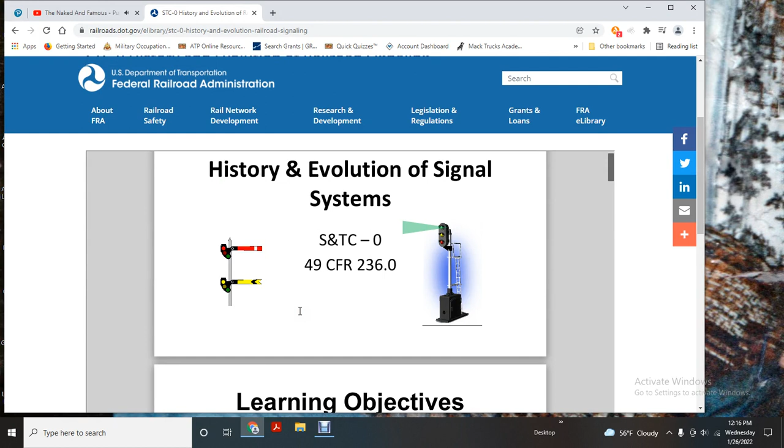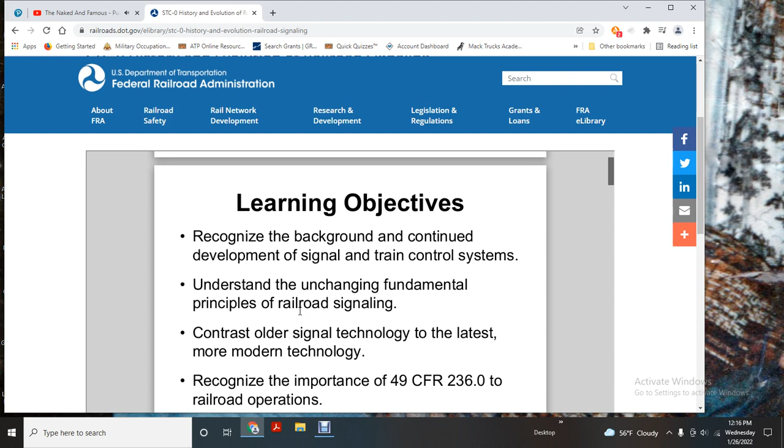Alright, history and evolution of the signal system: signal and train control, Title 49 CFR 236. Learning objectives: recognize the background and continued development of the signal and train control system, understanding the unchanging fundamental principle of the railroad signal. Contrast older signal technology to the latest, more modern technology. Recognize the importance of Title 49 CFR 236 to railroad operations.

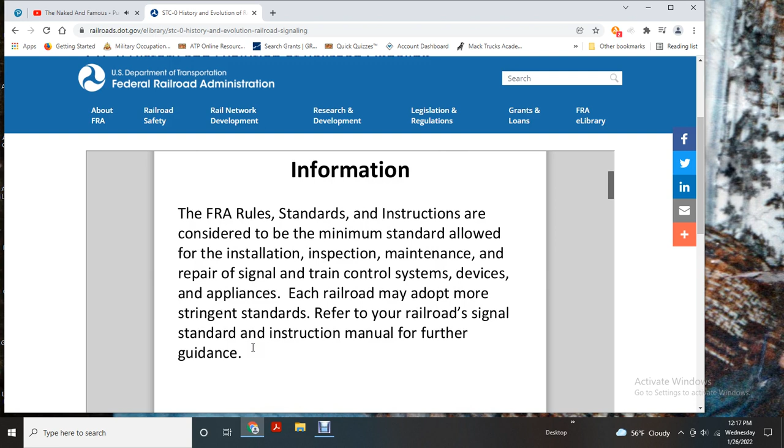Caution: the following presentation was developed to provide general information only. For detailed compliance information, please refer to Title 49 CFR 236 Rules, Standards, and Instructions, and the Signal and Train Control technical manual. Each employee should refer to the appropriate manual or regulations when dealing with any specific information. FRA rules, standards, and instructions are considered minimum standards allowed for the installation, inspection, maintenance, and repair of signal and train control system devices and appliances. Each railroad may adopt more stringent standards. Refer to your railroad's signal standard and instruction manual for further guidance.

Early railroad operation. Early trains operated with a system called the time interval rule. The trains ran by strict schedules, cumbersome, time-consuming, exhausting. If one train was delayed, waiting trains had to wait 1 hour, and a brakeman would walk 20 minutes out with a red flag. The engineer would move the train forward. The first brakeman dispatched the second brakeman to walk another 20 minutes ahead. This process was repeated until the train reached the next station.

Telegraph in early railroads. 1840s, Erie Railroad begins installing telegraph. In 1851, the Erie Railroad issues the first telegraphic train order. 1860, rapid expansion of railroads is matched by expansion of the telegraph system. 1920s, over 78,000 telegraphs were working on American railroads.

First telegraphic train order: to agent operator Goshen, hold the train for further orders. Charles Minot, superintendent. Then he hand wrote the following order: to conductor and engineer, day express, run to Goshen regardless of the opposing train. Charles Minot, superintendent. The train order method of operation was born September 22nd, 1851. This method of operation is still used on some lines today.

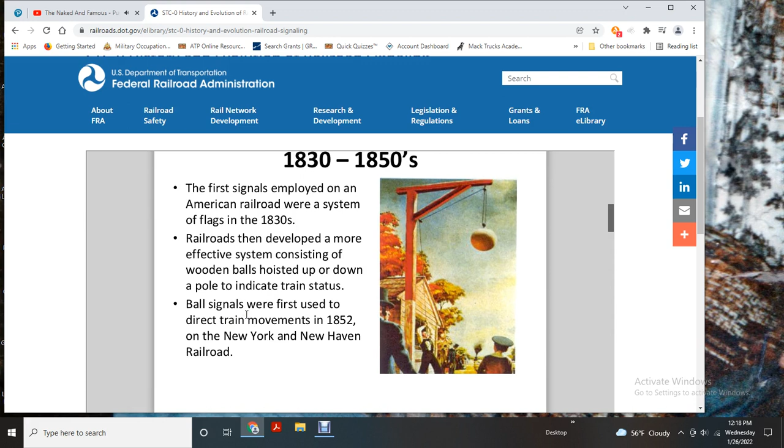1830s to 1850s, the first signals employed on American railroad systems were systems of flags. In 1830, railroads then developed a more effective system consisting of wooden balls hoisted up and down a pole indicating a train's status. Ball signals were first used to direct train movements in 1852 with the New York and New Haven Railroad.

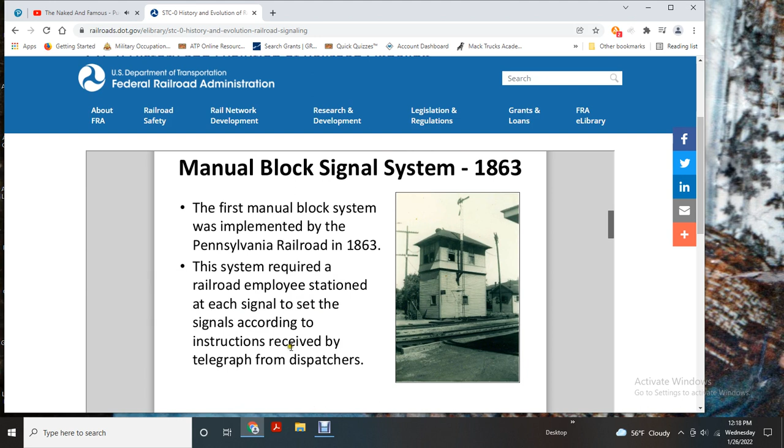Manual block system, 1863. The first manual block system was implemented with the Pennsylvania Railroad. The 1863 system required a railroad employee stationed at each signal to set the signals according to instructions received by telegraph from the dispatcher. Manual block system, Association of American Railroads: a block signal system where each block is governed by block signals controlled manually, or block limit signals, based upon information by telegraph, telephone, or other means of communication. Manual block signal system, 1863.

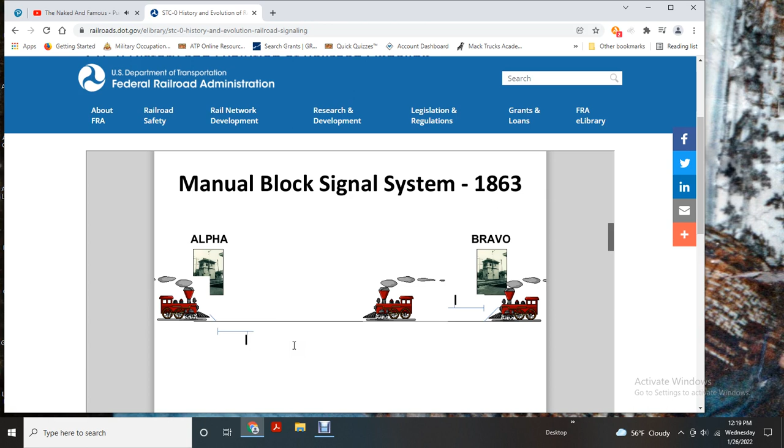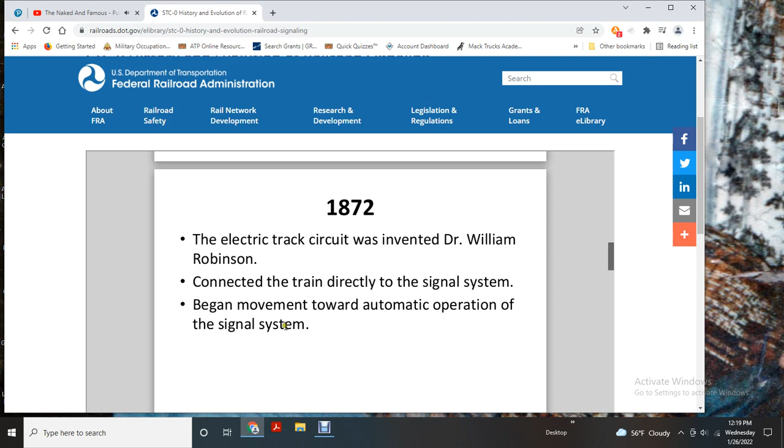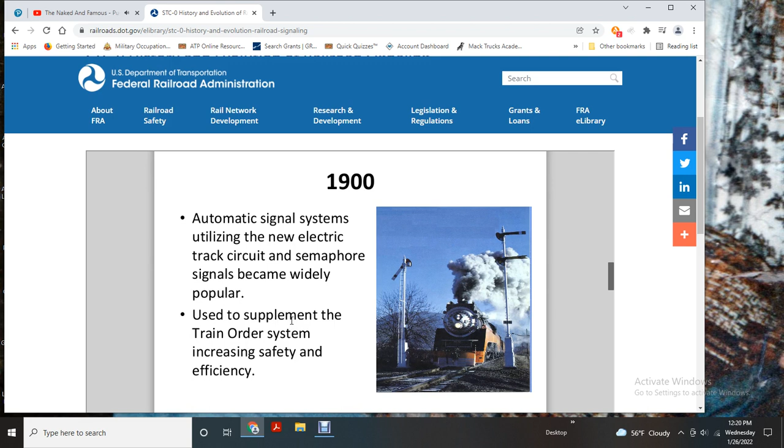In 1872, the electrical track circuit was invented by Dr. William Robinson, connecting the train directly with the signal system. This began the movement toward automatic operation of the signal system. Basic track circuit, track circuit definition 236.726: an electrical circuit of which the rails of the track form a part. 1900s, automatic signal systems utilizing new electrical track circuits and semaphore signals became widely popular, used to supplement the train order system and increase safety and efficiency.

Automatic block signal system definition, Association of American Railroads: a block signal system wherein each block is governed by automatic block signals, cab signals, or both, operated automatically at the entrance of the block. An automatic block signal system is a railroad signal system that consists of a series of signals that divide a rail line into a series of sections or blocks.

Automatic block signal operation is designed to allow trains operating in the same direction to follow each other in a safe manner without risk of rear-end collision. Introduction of ABS reduced the railways' costs and increased capacity, and the automatic operation comes from the system's ability to detect whether blocks are occupied or otherwise obstructed and convey that information to approaching trains. Automatic block system, simplest form of the automatic block signal system. Automatic block signal system, absolute permissive block system.

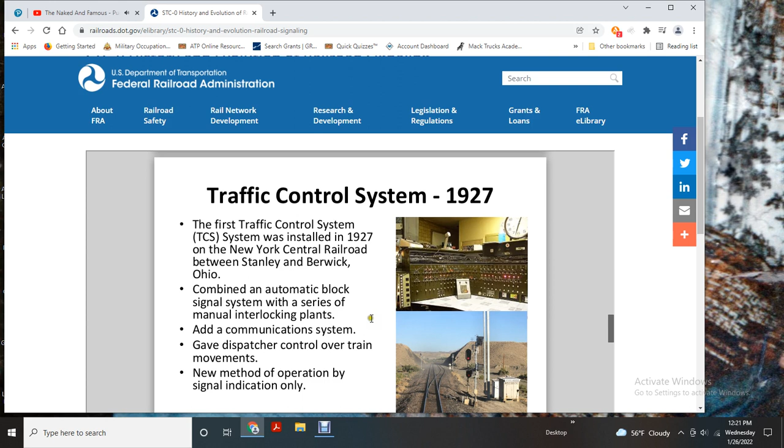Traffic control system, 1927. The first traffic control system was installed in 1927 on the New York Central Railroad between Stanley and Berwick, Ohio. It combined an automatic block signal system with a series of manual interlocking plants. Adding a communication system gave dispatchers control over the train, moving toward a new method of operation by signal indication only.

Automatic train stop, 1920s. Automatic train stop system with automatic traffic control. ATS was more reliable and had few inadvertent activations, and automatic train stop had become feasible for long distance freight railroads.

The Interstate Commerce Commission issued an order requiring 49 railroads to install automatic train stop on at least one of their passenger divisions.

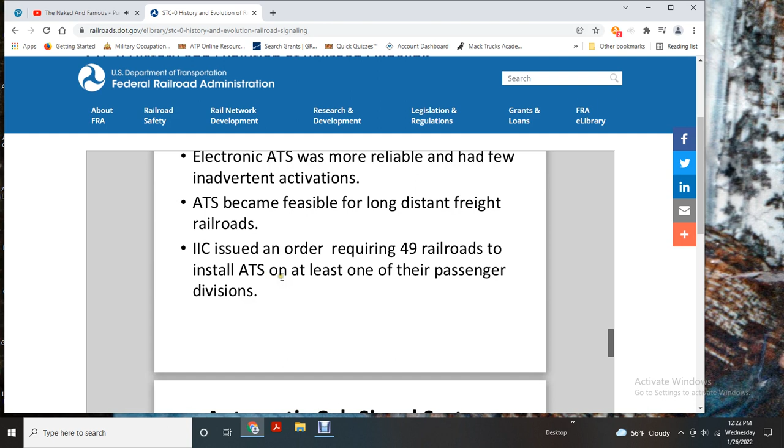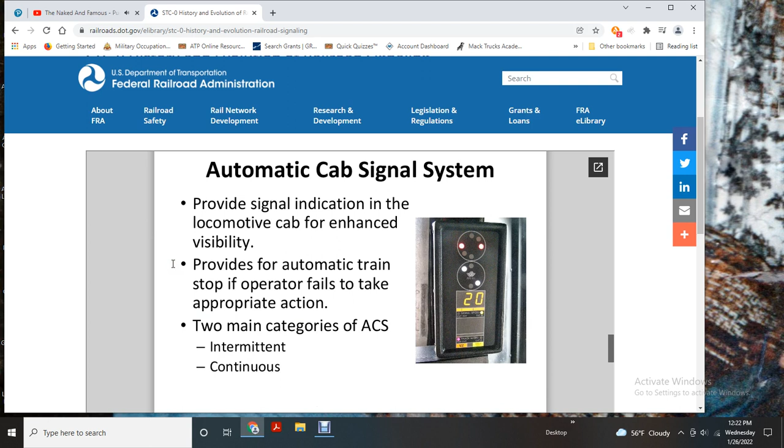Automatic cab signal provides signal indication in the locomotive cab, enhancing visibility. It provides automatic train stop if the operator fails to take appropriate action. The main categories of automatic cab signal are intermittent and continuous.

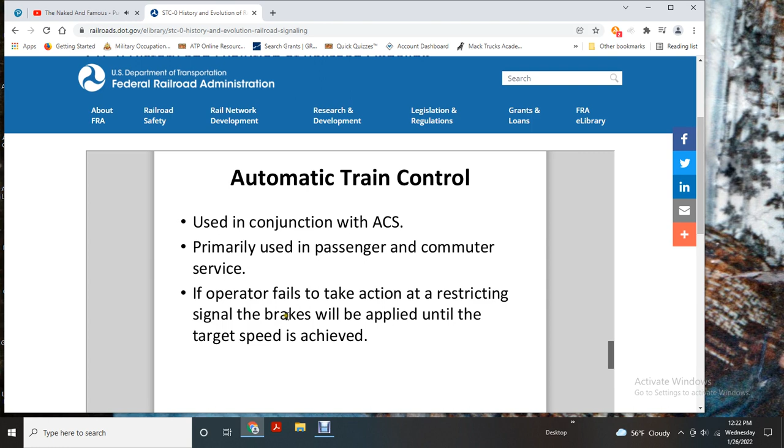Automatic train control is used in conjunction with the automatic cab signal system, primarily for passenger trains. If the operator fails to take action on a restricting signal, brakes will be applied until the target speed is achieved.

Title 49, section 236.0, paragraph C: when passenger train speed is 60 miles per hour or more, or freight train speed is 50 miles per hour or more, a block signal system should be installed.

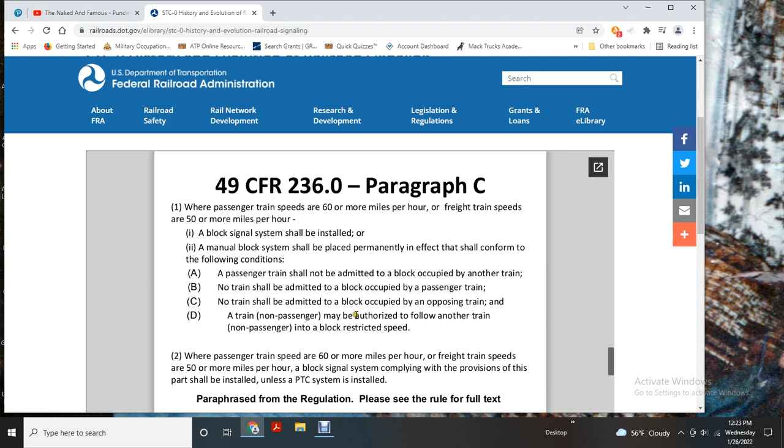A manual block system should be placed permanently in effect to conform with the following conditions: a passenger train shall not be admitted to a block occupied by another train; no train should be admitted to a block occupied by a passenger train; no train should be admitted to a block occupied by an opposing train. A non-passenger train may be authorized to follow another non-passenger train into the block at restricted speed.

When passenger trains operate at 60 miles per hour or more, or freight train speeds are 50 miles per hour or more, block signals complying with the provisions of this part shall be installed, or a PTC system installed. This is a paraphrase of the regulation; please see the rule for the full text.

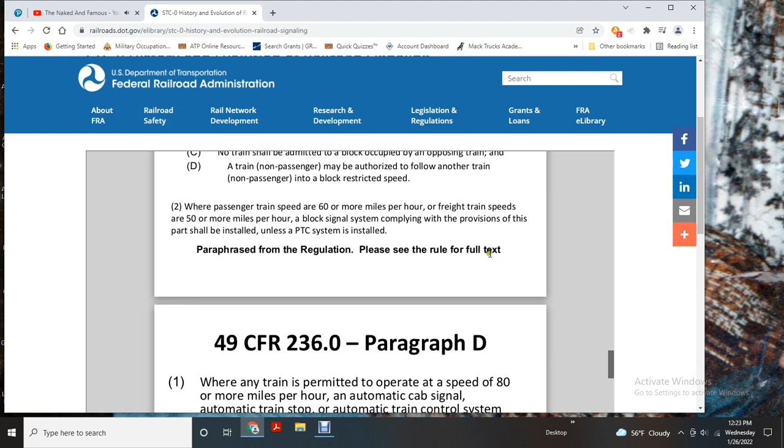Where trains are permitted to operate at speeds of 80 miles per hour or more, an automatic cab signal, automatic train stop, or automatic train control system shall be installed, unless an FRA-approved PTC system is installed.

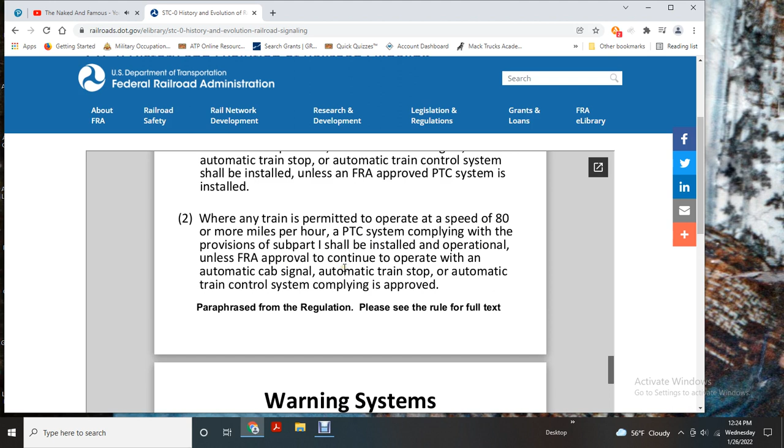Where any train is permitted to operate at a speed of 80 or more miles per hour, a PTC system complying with the provisions of Subpart I shall be installed and operational, unless FRA approval is granted to continue operating with an automatic cab signal, automatic train stop, or automatic train control system.

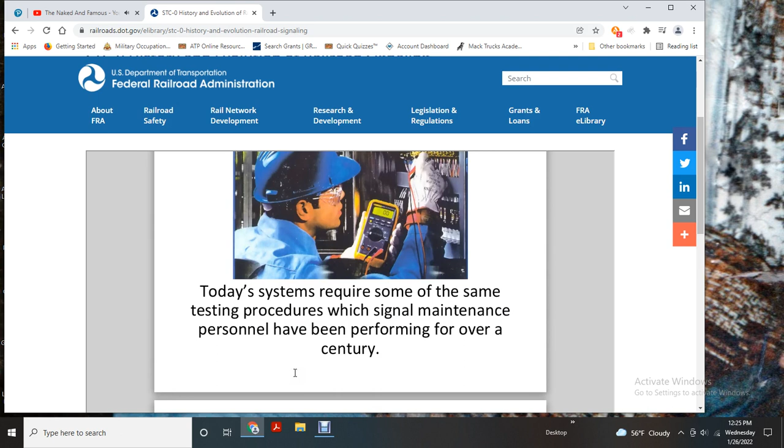Today's systems require some of the same testing procedures that signal maintenance personnel have performed over the past century. Signal and train control personnel should be aware of the different technology systems in use, and recognize the challenges encountered in testing, inspecting, and maintaining these systems.

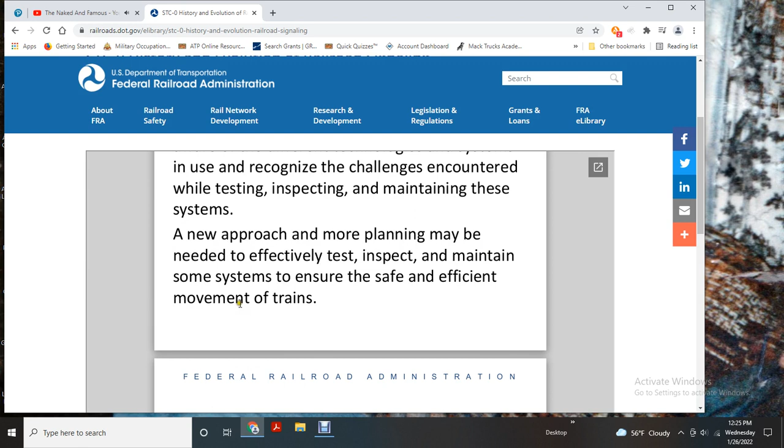A new approach, with more planning, may be needed to effectively and safely inspect and maintain these systems, ensuring safe and efficient movement of trains. As the signalman's axiom goes: remember, there are lives at stake in this business.

Signal train control, railroad history, and Title 49 CFR 236.0. The end.